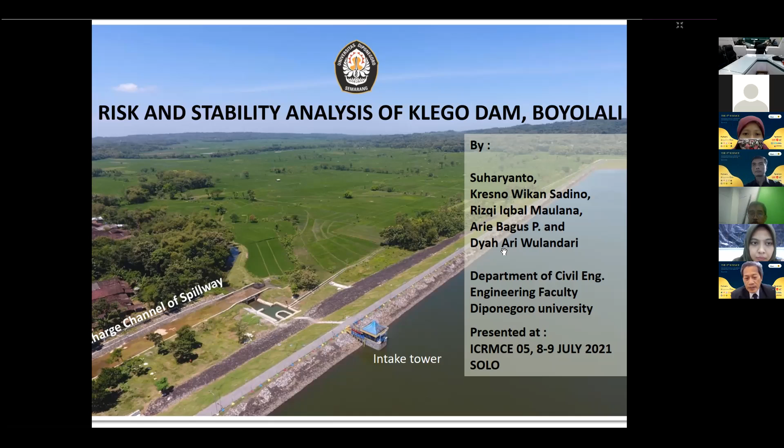The structure of the presentation will be divided into background, condition of Klego Dam, determination of cross-sectional and material properties of the dam, analysis and discussion, and then conclusion and recommendation. Next, please. Now the background.

The Klego Dam actually was built in 1990 and operated since 1993. It is used to supply irrigation water of about 1,353 hectares. The management at that time was by Balai Besar Wilayah Sungai Bengawan Solo, but the allocation of water is managed by Dinas Pekerjaan Umum Boyolali, the Boyolali Regency.

But in 2010, the management of the dam is relinquished to Balai Besar Wilayah Sungai Pemali Juwana, and the water distribution is still under the authorization of Dinas Pekerjaan Umum Boyolali. Why there is a change? Because the location of the dam is at the boundary between the

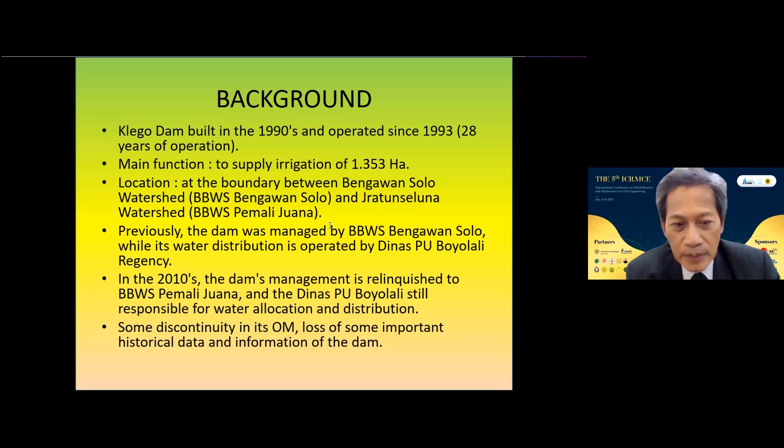Yeah, maybe can we go next? It's only the detailed location of the Klego Dam. And this is the condition for the Klego Dam from the survey we did in 2017. It is actually a small dam. The height is about 10 meters and the inundation area is about 75 hectares, not 1 square kilometer.

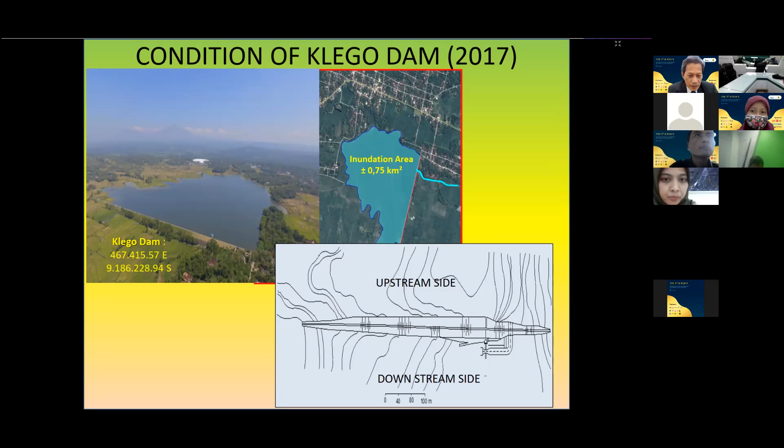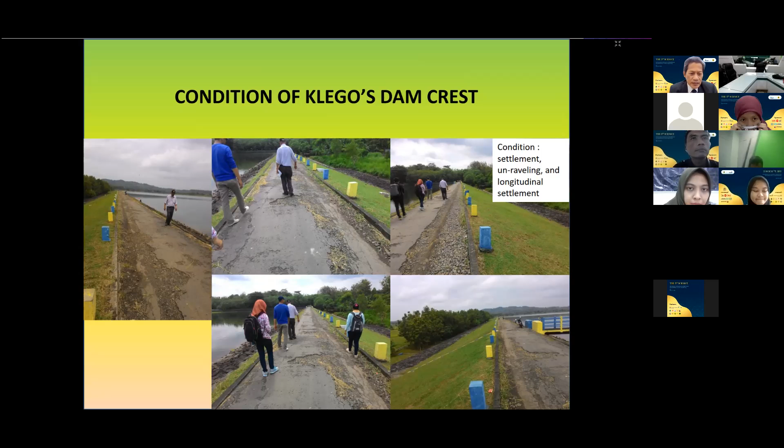Next, please. And this is the dam crest. At the time, people were allowed to pass through the dam crest. I mean, the society uses the dam crest as the access route to the neighboring village. So that's why it has heavy traffic on the dam crest that caused the surface to be rough, and a longitudinal crack and longitudinal settlement are also observed. It is a condition that is not supposed to exist in a dam. Next, please.

And this is showing the condition on the downstream. Also, some rock is misplaced. I mean, maybe some people are moving the rock around. And the condition on the spillway: there is some sedimentation. The function of the spillway is to allow the flood water to escape freely and quickly out of the dam. But if there is some sedimentation, it may hinder it so that the flood cannot discharge freely. So the next.

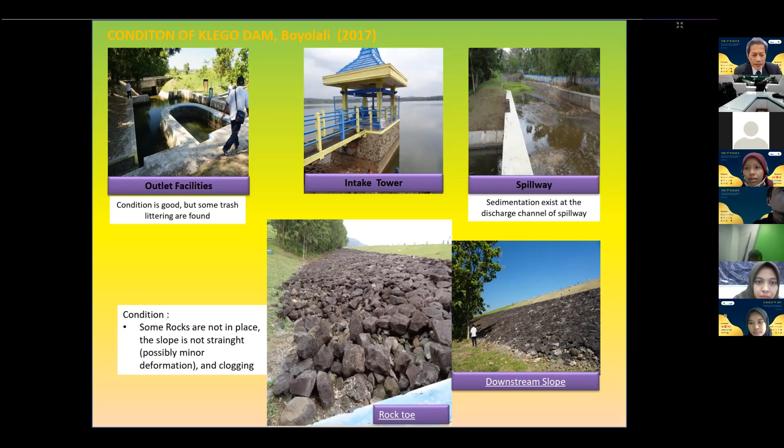Also in the downstream area, there is some fishbone drainage along the downstream slope of the dam clogged with mud, sand, soil, so that when there is rain, the surface runoff, which is supposed to be concentrated in the fishbone drainage to the drainage channel downstream, may flow over the dam body, which may increase the potential for dam body erosion. And also the instrumentation is not functioning quite well. Next.

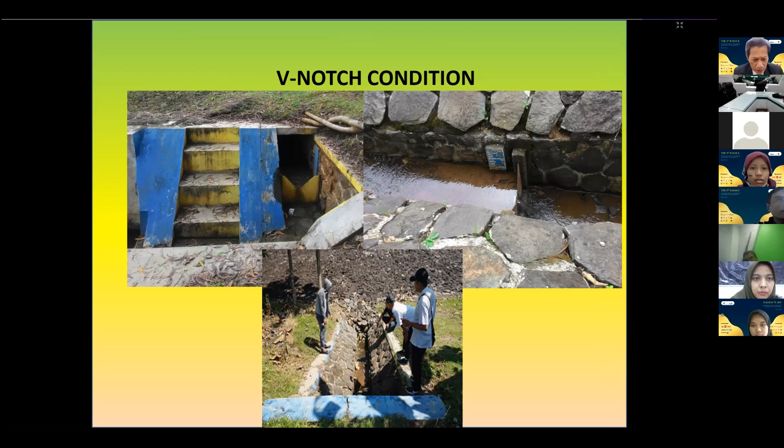The V-notch. The V-notch is the instrument to measure the amount of seepage through the dam. There are two V-notches. One is not functioning, and one is in not good condition. Next. Next.

So the physical investigation shows that the condition is not very good. And also there is a new earthquake map published in 2010 and 2017. So it raised the need to evaluate the safety of the dam. However, we have some difficulties in knowing the properties of the material of the dam.

So we conducted machine boring at 6 locations, boring machine number 1 to number 6. Numbers 1, 3, and 5 are at the downstream side of the dam crest, and numbers 2, 4, and 6 are on the upstream side of the dam crest. The boring is performed to a depth of 10 meters. And every 2 meters, we collect an undisturbed sample, so that we can know the material properties in the dam body. Next.

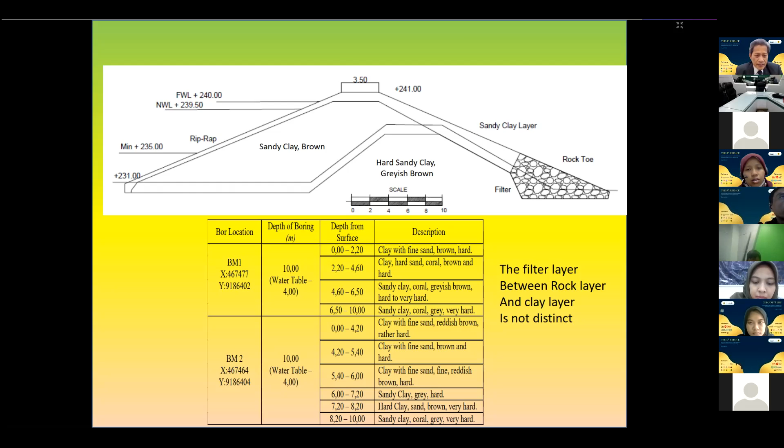So based on this fact, we conclude that the cross-section of the Klego Dam is something like that, with the existing hard clay in the downstream part. Yeah. Next.

And then for the analysis, we first do the risk evaluation, the total risk factor. It's using the capacity risk factor, CRF, and then the dam height factor, height risk factor, HRF, and the evacuation need, evacuation risk factor, ERF, and the downstream damage factor, the DRF.

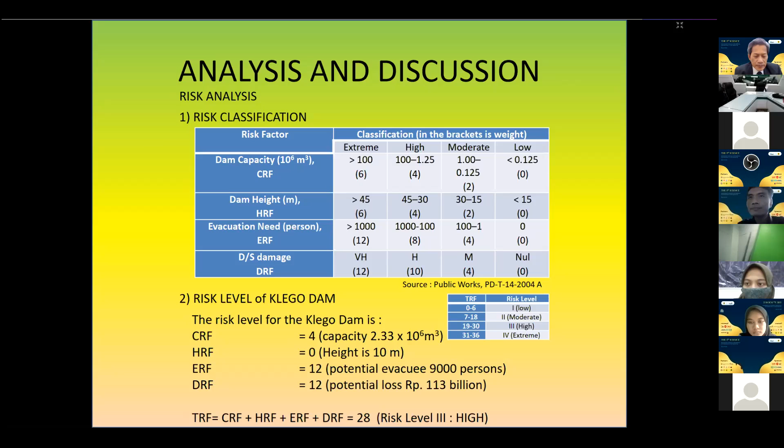So it is very high, 28. The next, please. So based on this high risk, we do the analysis using the OBE and MDE for this return period of the earthquake load. Next, please.

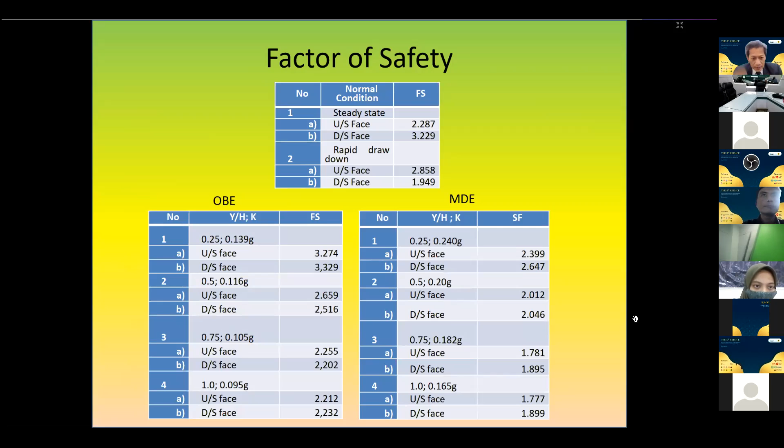Fortunately, during the normal condition it is still over 1.5, and even during the earthquake condition for the OBE load and MDE load, all still over 1.5. So it is safe based on the criteria from the factor of safety. Next, please. It shows the result of the GeoStudio.

The conclusion: it is still safe, even during the OBE and MDE earthquakes. However, the material that we use is based on bore machine data from 6 locations. So more data would give us more understanding of the material of the dam. And from the seepage, it is also safe.

But the recommendation, due to the uncertainty of the dam material, we actually need to do a sensitivity analysis of various variations in the material properties. And the conditions that need to be repaired: the dam crest, the riprap rock layer, the instrumentation, and also the operation and maintenance. We also need to restrict people's access route on the dam crest.

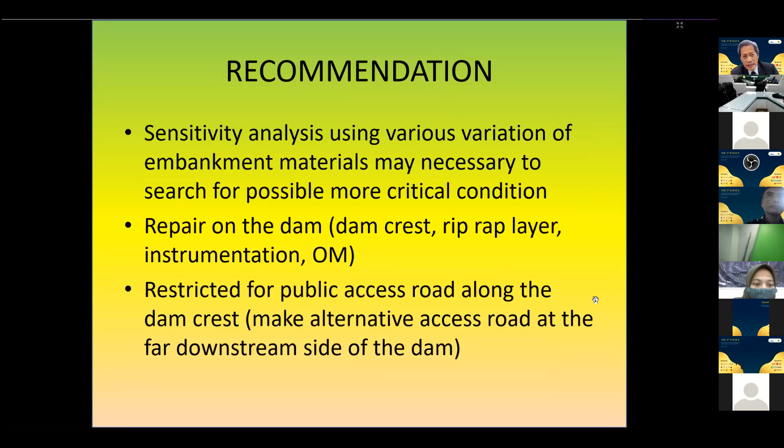Thank you very much, Pak Purwanto. Okay, thank you, Prof. Suharyanto, for your excellent presentation about the condition of Klego Dam. I open discussion for the participants. If you have any question to Prof. Suharyanto, please inform us. You can raise your hand or directly use your microphone to deliver your question.

Maybe if participants want to use Indonesian, it's okay. If you are shy to use English, you can use Bahasa. Probably it is easier. Okay, Mr. Heri. Pak Heri, silakan. Okay, thank you very much for your time.

I have 2 questions for Professor Suharyanto. One question is, from the picture in the presentation, the dam is to recharge the water, right? So my question is, how does the Klego Dam get its water supply? Does it rely on precipitation or rainfall, or another supply?

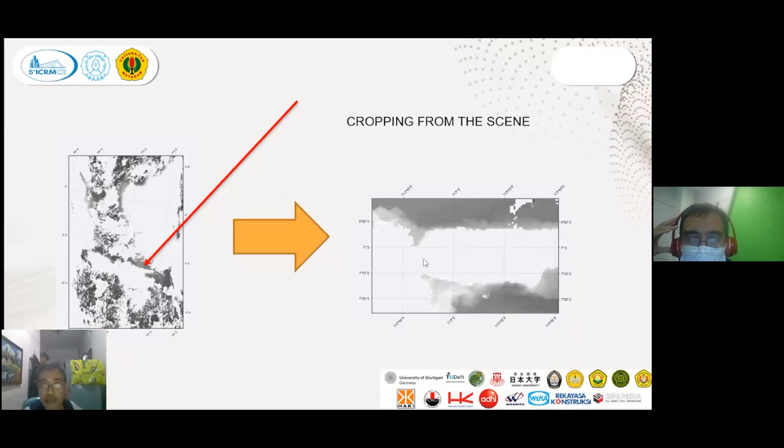And this is the operation on the satellite image scene. This is the whole scene or full scene, and then we did the scene cropping, and the final process is like this. As you can see in this picture, we crop to this location at Bangkalan. And this is the coordinate, longitude, latitude, with the parameter.

This is the summary of the algorithms from the mathematical models: linear, exponent, logarithmic, and power. As you can see, this is the final result of the models, and the best result is the exponent with an R value of 0.779.

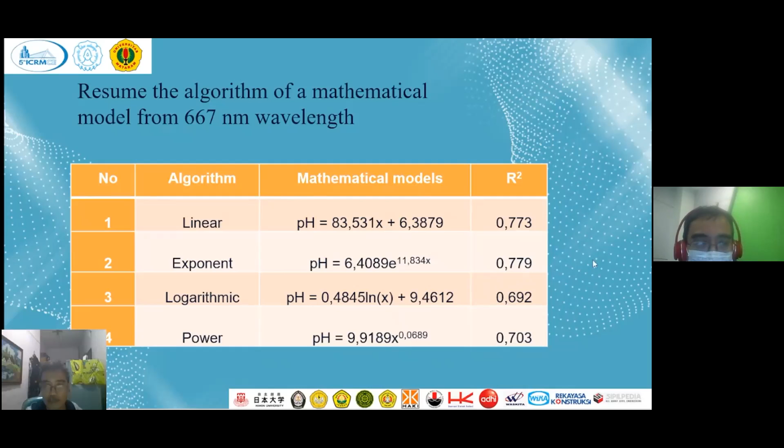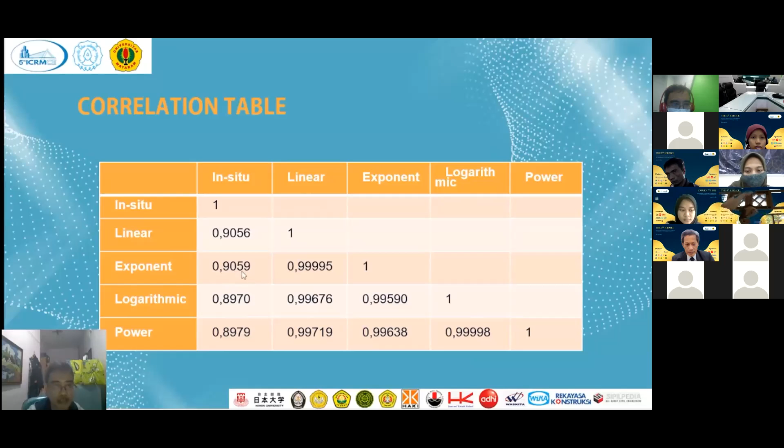And this is the correlation table. As you can see, we compare the in situ with the other models: linear, exponent, logarithmic, and power. And we can see that the in situ has the higher correlation with exponent, 0.9059. So we can choose the exponent algorithm to make a thematic map of acidity value in the area we chose, Bangkalan.

As a conclusion, Aqua MODIS image data can be used as a reference to identify the mathematical model algorithms that are able to calculate any parameter such as the acidity or pH value of the coastal water environment. This study concludes that the distribution of acidity in the Bangkalan coast is still within the safe pH range for aquatic ecosystems on the coast.

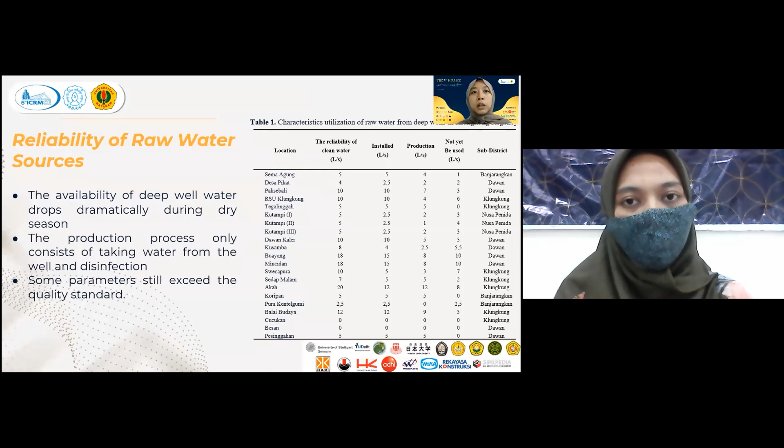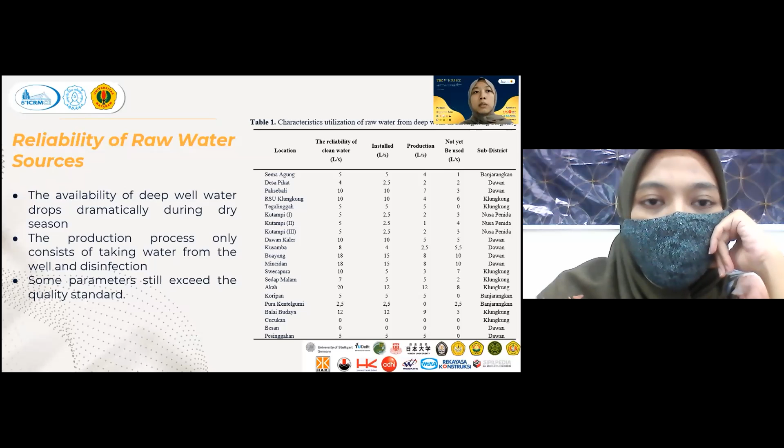The production process only consists of taking water from the well through a submersible pump and disinfection using chlorine gas. Then the water is directly distributed to customers. The disinfection process is carried out by injecting chlorine gas directly into the distribution pipe. However, some deep wells still have some parameters that exceed the quality standard.

Next is water quality. Table 2 showed that the predominant parameter is aluminum, followed by color and TDS. But for this study, no further discussion was carried out for the TDS parameter, since deep wells in the Nusa Penida area, where the excess of TDS occurs, already have a distillation unit to process the excess TDS.

According to Permenkes number 492 of 2010 concerning drinking water quality requirements, aluminum's allowed drinking water content is 0.2 mg per liter, and as shown in table 2, most of the deep wells exceed the quality standard. Excess aluminum content in the body can cause neurological disease, while the presence of color will interfere with water aesthetics and indicate polluted water.

The next one is water treatment decision analysis. Table 3 shows the considerations used in the selection process. The design unit determination is done through a literature study, looking at previous research on aluminum and color removal. The PDAM wants processing that is as simple as possible and does not require high cost. Therefore, several considerations were made to choose a design alternative.

At this stage, the selection unit will be varied in processing methods, materials, or configurations for further evaluation using the MAUT method. The description of alternatives has been discussed previously, proposing 3 alternative processes: adsorption using granular activated carbon adsorbent with a fixed bed adsorption column, adsorption with silica adsorbent with a fixed bed adsorption column, and adsorption with powdered activated carbon.

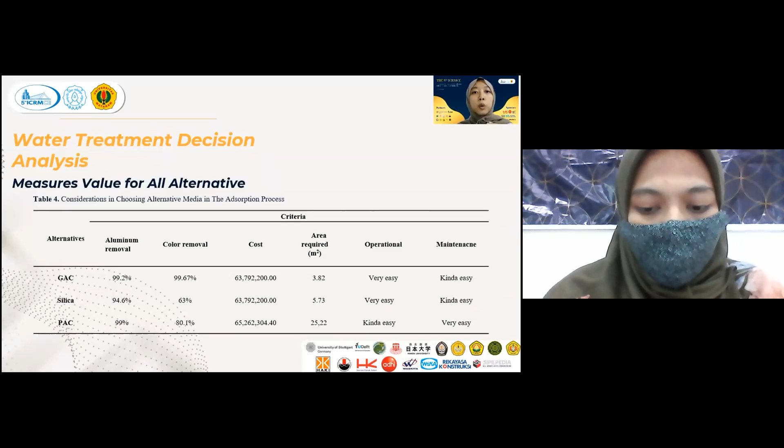After the weight value for the qualitative criteria is determined, a summary is made of all the measure values for each alternative, as shown in table 4. The utility value is calculated on each criterion for each alternative. This utility requires quantified criterion value data. Relative weight calculation is carried out on each measure based on the value of the level of importance. The calculation result can be seen in table 5.

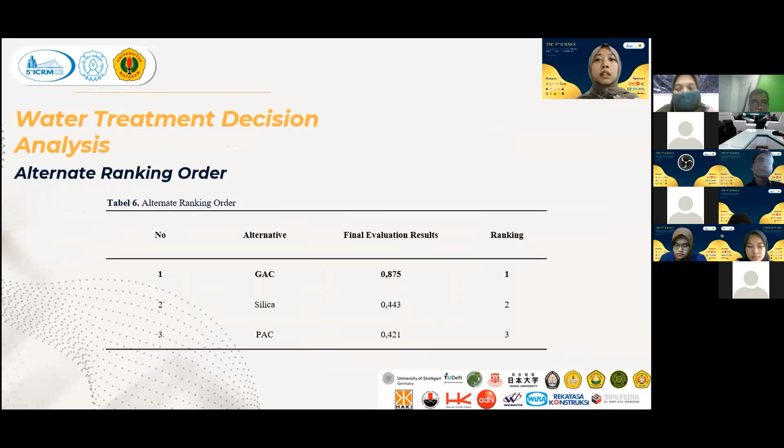In calculating the final evaluation, the utility value data and the weight normalization of each criterion are needed. Based on the analysis using the MAUT method, an alternative ranking was obtained for the deep well, as listed in table 6. Adsorption with granular activated carbon adsorbent was chosen as the best alternative for the well. Figure 1 shows an example of a circuit used, a fixed bed adsorption column in a deep well in Klungkung Regency.

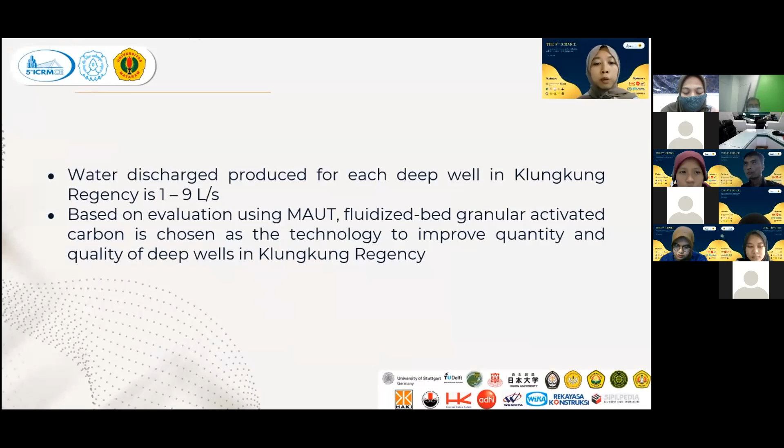After selecting the best alternative, detailed planning should be carried out regarding the granular activated carbon processing implemented in Klungkung Regency. The last one is conclusion. From the study, we can conclude that water discharge produced from each deep well in Klungkung Regency is around 1 to 9 liter per second, and based on evaluation using the MAUT method, fluidized-bed granular activated carbon is chosen as the technology to improve quantity and quality of deep wells in Klungkung Regency.

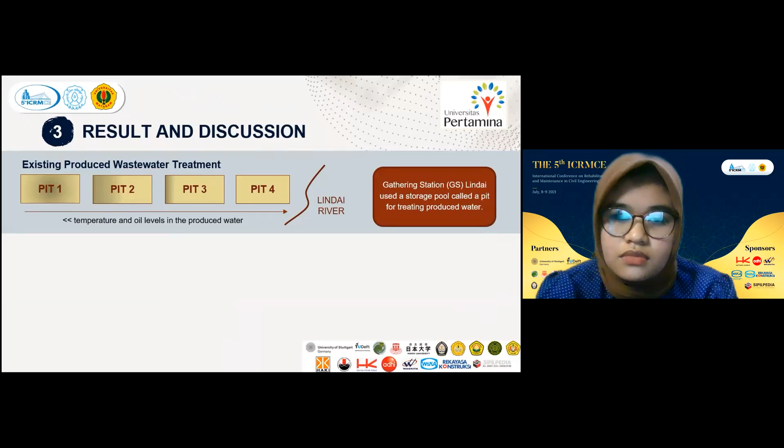And that is why oil and grease removal has the highest score compared to the other criteria. On the other side, the criteria of operation and maintenance is more prioritized than the needs of the efficiency of COD removal, land requirement, and cost. This having a score of 3.

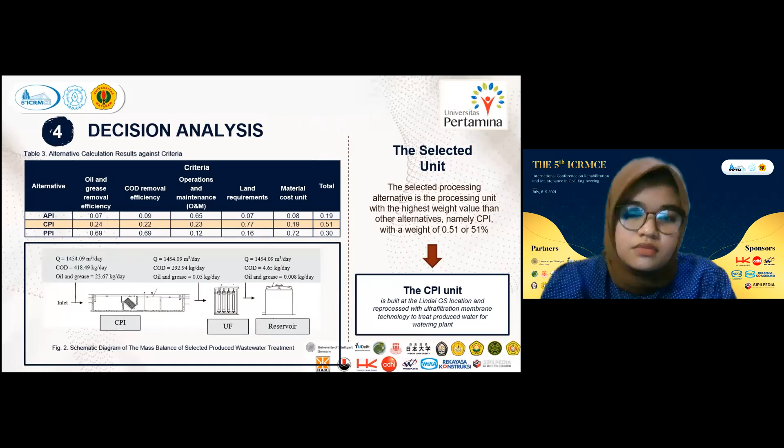Next is the conclusion. The reclamation of produced water from the upstream activities in the oil and gas industry is carried out using a CPI unit and ultrafiltration, selected based on the analytical hierarchical process method, to eliminate high oil and grease and COD content from the water.

This is the reference that we use.

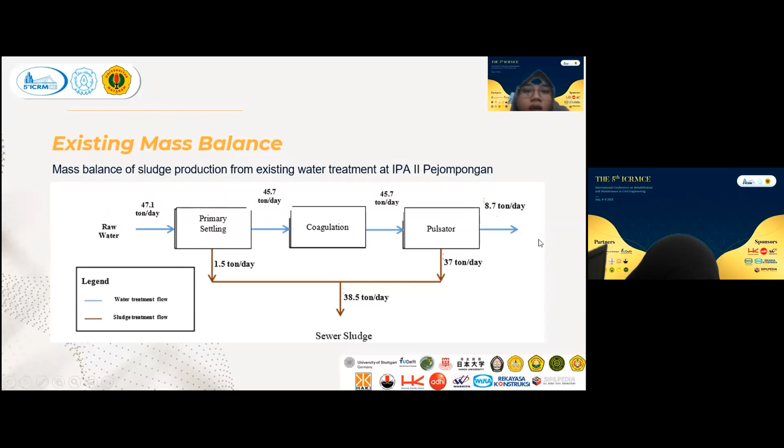Next is data and method. This is the existing mass balance of sludge production from water treatment at IPA 2 Pejompongan. The sludge sampling method is area integrated, combining samples taken from the pre-sedimentation basin, or primary settling, and the pulsator. This is data from IPA 2 Pejompongan from January until December 2019.

Next is sludge quality data. This is a comparison of sludge quality with the standard in Jakarta, and the regulation is the Regulation of the Governor of the Special Capital Region of Jakarta Province Number 69 of 2013.

Next is the method. In this paper, we use 4 alternative mechanical dewatering units, that is belt filter press, centrifuge, screw press, and pressure filter press. In selecting alternative sludge treatment plants, the parameters that must be met are land area and electrical energy requirement. The available land area is 1,300 square meters, and the maximum electrical energy that can be used for a sludge treatment plant is 100 kilowatts.

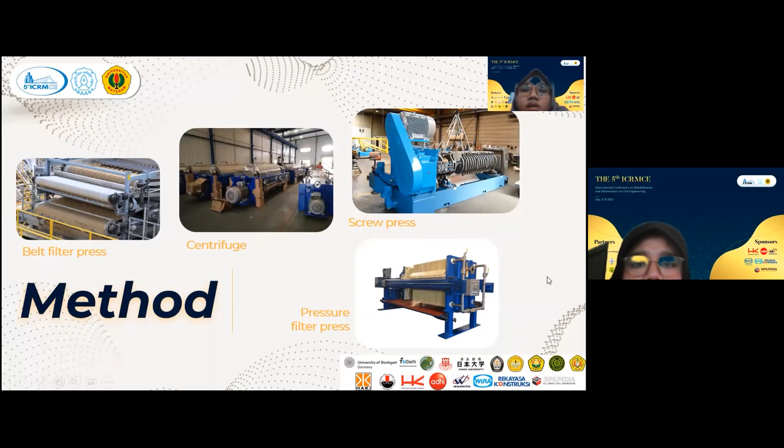TOPSIS is a method that can determine the best alternative from several alternative solutions with various criteria. This is the equation. There are the positive ideal solution, negative ideal solution, and the preference value. The key point of this method is the greater the preference value, the smaller the distance to the positive ideal solution, and the further away the distance to the negative ideal solution. The alternative with the greatest preference value will be chosen.

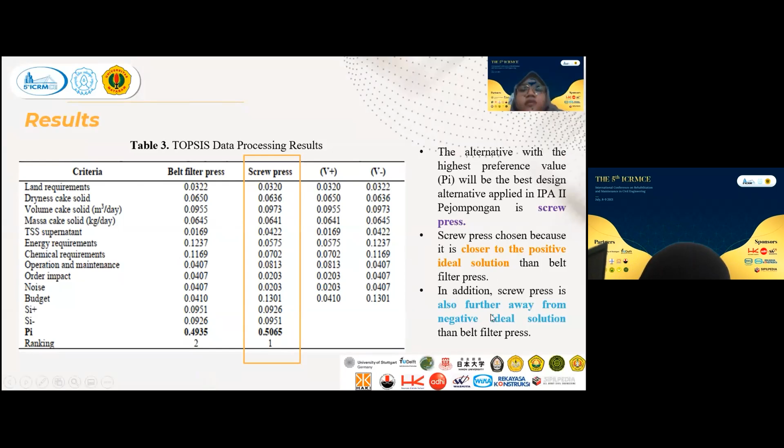And these are the TOPSIS data processing results between the belt filter press and screw press. The result is that the screw press is the alternative with the highest preference and will be the best design alternative applied in IPA 2 Pejompongan. Why screw press? Because the screw press is closer to the positive ideal solution and also further away from the negative ideal solution than the belt filter press.

And so the conclusion is that the results of the best alternative selection analysis show that the screw press can be used as sludge treatment at IPA 2 Pejompongan. And before using the screw press, pre-treatment in the form of gravity thickening and sludge conditioning is required. And these are the references we use in this paper.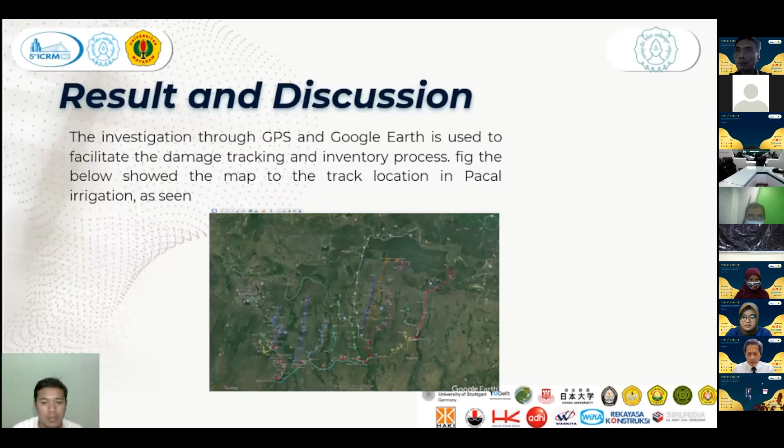Next, the investigation through GPS and Google Earth is used to facilitate the damage tracking and inventory process. The picture below shows the map to track location in Pacal irrigation. After the investigation, the results show the damage to Pacal irrigation infrastructure. The evaluation is based on Minister of Public Works and Public Housing Regulation number 12 of 2015, where the physical condition index is presented in the table below.

Based on the result above, Pacal irrigation infrastructure condition can be determined. According to the table above, the damage of Pacal irrigation main infrastructure is 4.40%. It came from a lot of components such as reservoir, sluice, sand trap, and wastegate. On the other hand, the damage of 7.40% happened in canals and 0.75% in canal structures. The total damage in Pacal irrigation infrastructure is 12.55%, showing a minor level of damage.

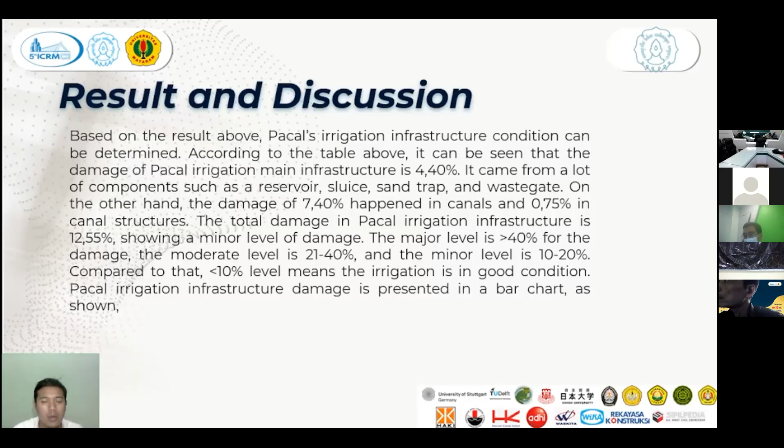The major level is more than 40% damage. The moderate level is 21 up to 40%, and the minor level is 10 up to 20%. Compared to that, less than 10% means the irrigation is in good condition. Pacal irrigation infrastructure damage is presented in a bar chart as shown. Requirements for the maintenance of the irrigation scheme of each irrigation area must consider the performance of the irrigation area in the aspects of the physical infrastructure condition of the network and other supporting aspects.

In conclusion, from the analysis above, the physical damage of Pacal's primary canal is 12.55%, indicating a minor level of damage. Meanwhile, for the area's network and infrastructure, regular maintenance was needed to ensure the irrigation performance ran efficiently for watering the agricultural field. That maintenance could be cleaning the weed that grew uncontrollably around the canals, plastering the cracks of the broken canal walls, lubricating the hinges of sluice, coating the sluice gate with anti-corrosion paint, and changing the broken wood.

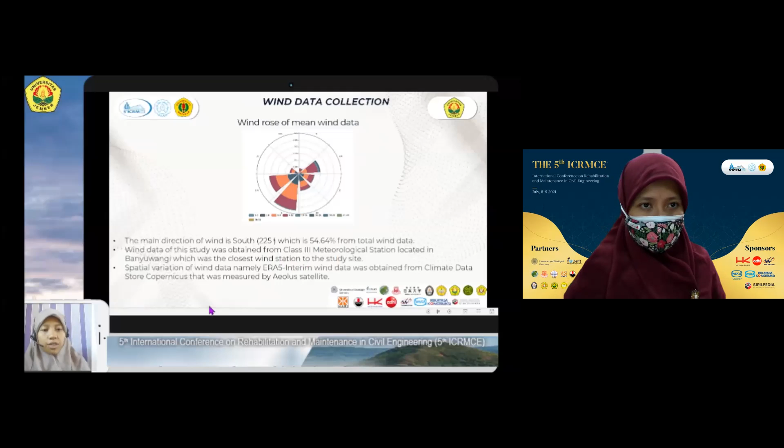Wind data of this study was obtained from Class 3 Meteorological Station in Banyuwangi, which is the closest station to the study site. And also we use the spatial variation of wind data from Climate Data Store Copernicus. For the bathymetry data, we use the bathymetric data from Indonesian Geospatial Information Agency.

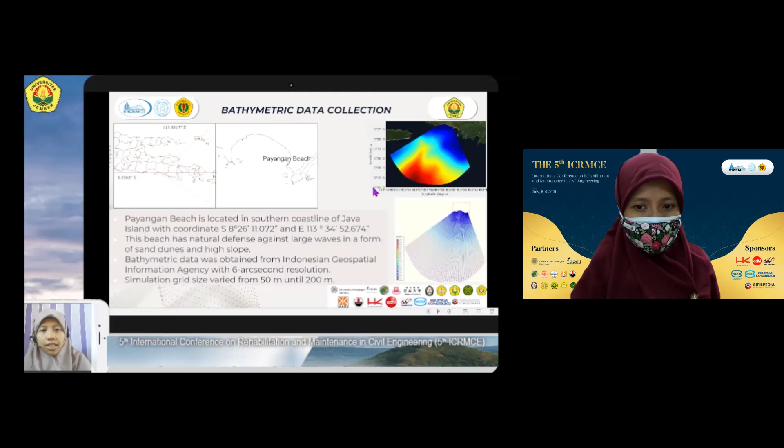And this is the bathymetric data, and the simulation grid size shown here with the size variation from 50 meter until 200 meter. Payangan Beach is located here. It is at the southern coastline of Java Island. This is the simulation results that we obtained in 2017.

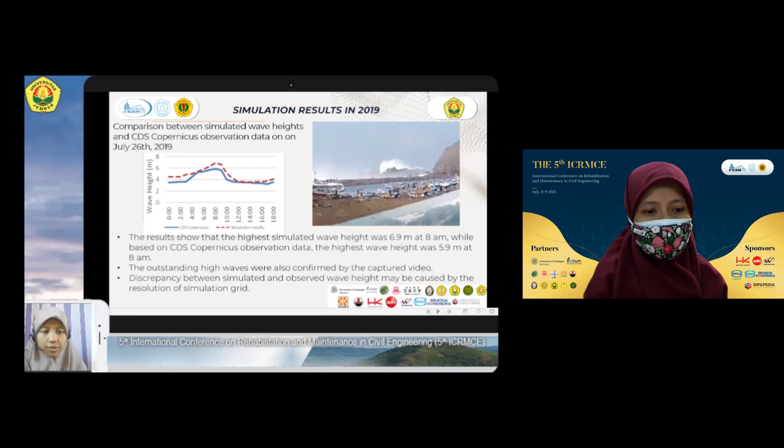Although there is still discrepancy between simulation and observational wave height, that may be caused by the quite small resolution of simulation grid. In 2020, the simulated wave height and the observation data reach almost similar results. And different from the simulated wave in 2017 and 2019, in 2020, the high wave occurred not in July, but 2 months earlier, which is in May.

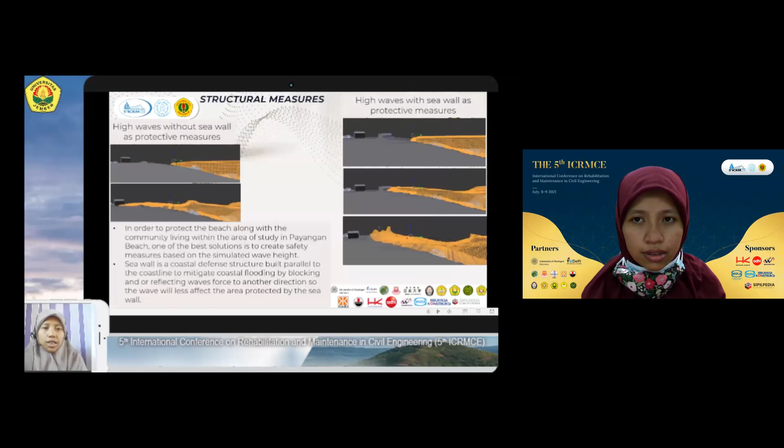In this slide, we try to make an illustration of the differences between the condition of houses with and without seawall. If there's no seawall, then the high waves that propagate from the ocean to the beach will inundate the houses. But when the seawall is developed here, the wave will be stopped by the seawall and it will not inundate the houses. So it is necessary to build the seawall as safety measures based on the simulated wave height.

As the conclusion of this study, high waves occurring at Payangan Beach are significantly high because of direct exposure to wind and wave from the open ocean. The simulated result in 2017 shows significant wave height of 2.5 meter to 4.5 meter near shore and around 5 meter offshore. However, in 2019, wave height reached 6 meter to 7 meter near shore of Payangan Beach.

And also in 2020, high wave occurred 2 months prior to other years, when it always occurred in late July, and that may happen because of climate change, and preventive measures must be taken into consideration to protect the coastal area and residential area located in Payangan Beach.

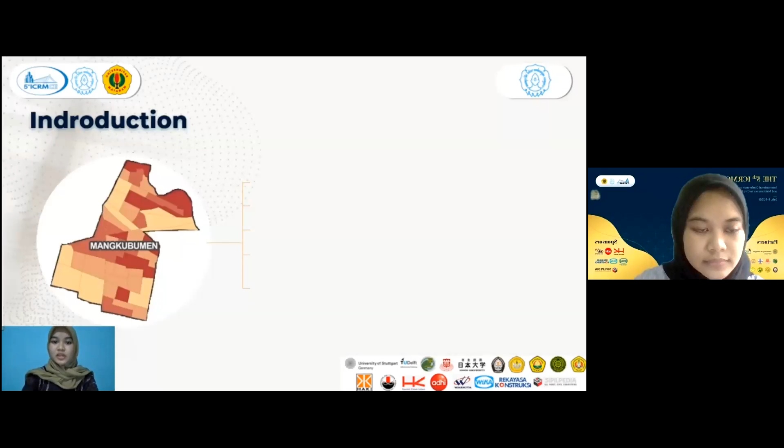This research started from public complaints about the frequent occurrence of inundation during the rainy season in Mangkubumen. Mangkubumen is one of the villages located in the center of the city of Surakarta. The population that continues to increase and the development of the trade and services sector makes land that was originally open to be built up. This, of course, will have an impact when the rainy season arrives. In addition, the drainage system in Mangkubumen village still uses a conventional drainage system in which all runoff will be transferred into the channel. Of course, from year to year, the channel will end its service life so that it is no longer able to accommodate the runoff.

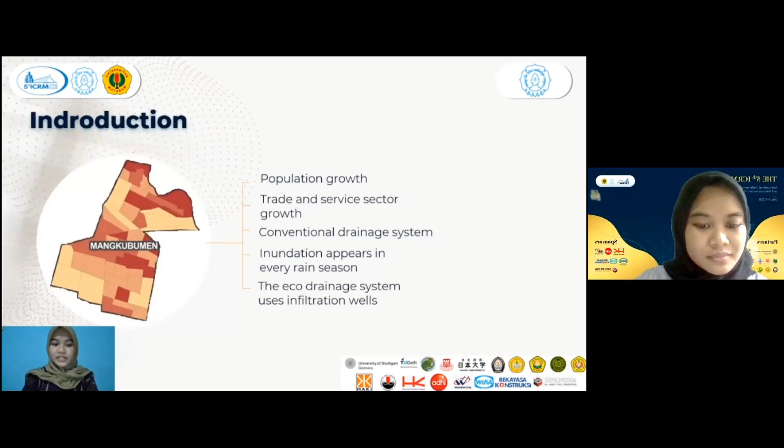The solution to this problem is to absorb water back into the ground by using infiltration wells as an alternative to an eco-drainage system. The concept of eco-drainage system is to maintain the existing channel so that the infiltration well will be placed at the bottom of the channel, with the assumption of the research being that the drainage channel is rainwater drainage. The main objective of this research is to determine the reduction of runoff by implementing infiltration wells in Mangkubumen village.

In this study, I conducted a survey of drainage canal tracing to obtain the existing condition and capacity of the channel. Next, I used the rational method to calculate the return period of peak discharge. The return periods of peak discharge that I use are 2 years and 5 years for residential area and urban area. Furthermore, to find out the inundation area resulting from the peak discharge, I used software named HEC-RAS. And lastly, I used the Sunjoto method to calculate the dimension and the absorption discharge that occur.

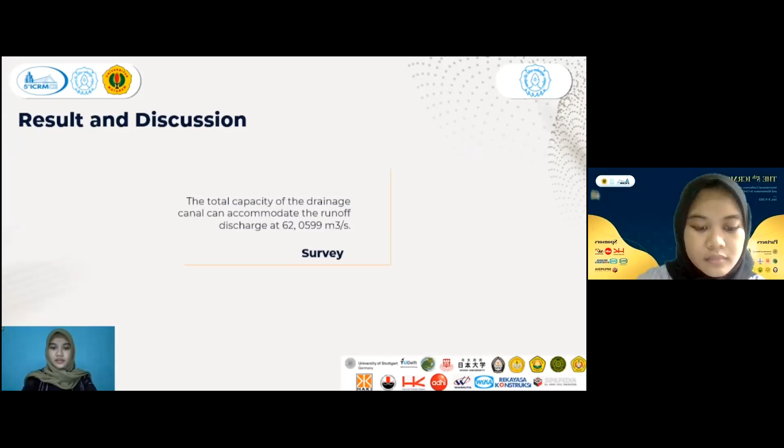The first result is the total capacity of the drainage canal, which can accommodate the runoff discharge at 62.0599 cubic meters per second. The next is peak discharge. The peak discharge in return period is calculated by using the rational formula. The peak discharge in return period 2 years is 18.2089 and for 5 years is 22.9937 cubic meters per second. And here is the graph of peak discharge using the rational method.

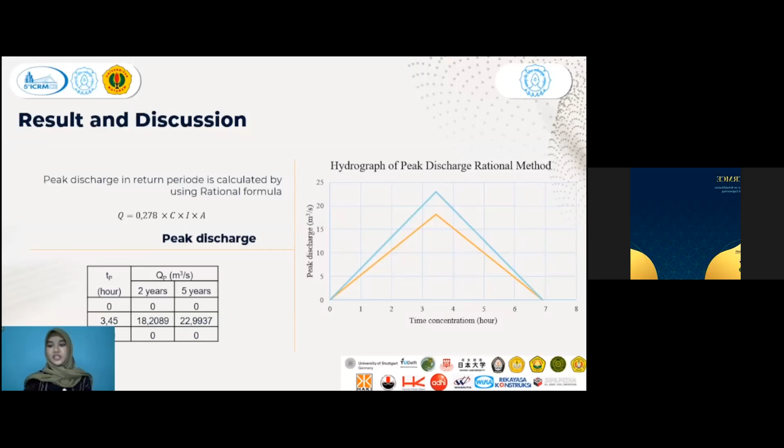And next is about running HEC-RAS. The peak discharge for the return period of 2 years and 5 years is inputted into HEC-RAS, and the output is the map of inundation. The area of inundation because of the 2-year peak discharge is 25 hectares, and because of the 5-year peak discharge, the area is 28 hectares.

And about the channel capacity: for the peak discharge of return period 2 years, the channel capacity can accommodate the runoff, but for the peak discharge of 5 years return period, the channel capacity cannot accommodate the runoff, and there is an inundation. And here we go to infiltration wells. The depth and absorption discharge of the infiltration wells are calculated by using Sunjoto's formula.

And here I have two alternative infiltration wells. The difference is the diameter and construction. The first alternative I use is PVC pipe construction with a diameter of 16 inches. The second alternative I use concrete construction with an inner diameter of 30 centimeters.

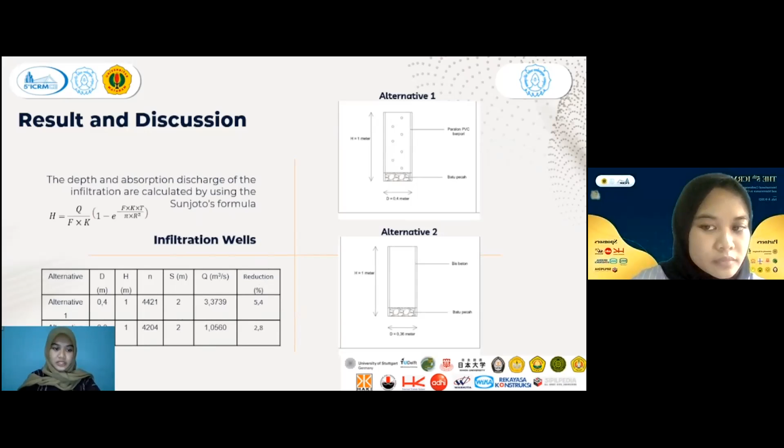And the reduction of alternative 1 is 5.4%, and the reduction of alternative 2 is 2.8%. And here is the cost per well: alternative 1 is PVC construction, cost 800,000 rupiah, and alternative 2 using concrete wells, the cost is 89,000 rupiah.

And the last is about the conclusion. First, the existing channel's capacity is able to accommodate runoff due to return period discharge 2 years, but it cannot accommodate the runoff due to period discharge 5 years at 906.42 cubic meters. The second, there are two alternatives of infiltration wells.

Alternative 1 can reduce the drainage load by 5.4%, but costs 800,000 rupiah per well. And the second alternative can reduce the drainage load by 2.8%, costs 89,000 rupiah. And the last, the dimensions of alternative 1 are diameter 40 centimeters and height 1 meter,

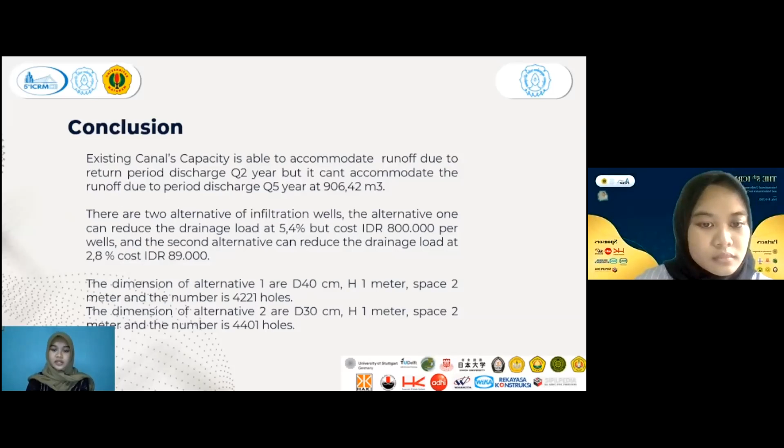and space between wells 2 meters, and the number is 4,221 holes. The dimensions of alternative 2 are diameter 30 centimeters and height 1 meter, and space between wells 2 meters.

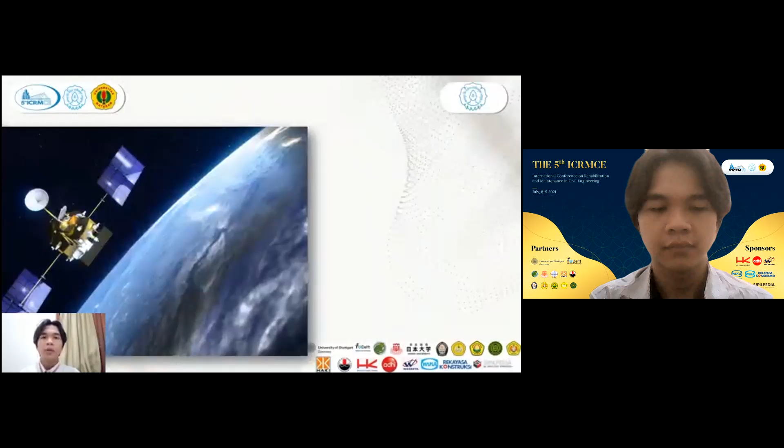The National Disaster Management Agency, BNPB of the Republic of Indonesia, noted that in 2018, 151 landslides occurred in Central Java Province. Landslides can be caused by rainfall; water falling down a slope will become a burden to the soil, affecting its stability. The need for rainfall data is essential in this case. The limited availability of rainfall gauges is a significant problem in Indonesia. Therefore, other data sources are needed to be processed in a particular case study, and one of the data sources is the Tropical Rainfall Measuring Mission, or TRMM data.

TRMM is a joint project between NASA, America, and the Japan Aerospace Exploration Agency. However, satellite data is considered less representative of the actual condition in the field. Therefore, validation of rain data needs to be done. The point of view carried out in this study is to validate the TRMM data to be used for safety factor analysis.

So this is the study of literature. Research conducted by Syaifullah in 2014 shows that GSMaP_NRT has a better correlation value to data on rainfall at the rain gauge station compared to data from 3B42RT.

A data homogeneity test was carried out to ensure that the data used were classified as homogeneous. And from there, the variation of rainfall between stations is linear, and any post is considered to represent the nearest area. The SCS-CN method is considered possible to analyze the infiltration, because this method also considers soil condition in determining the curve number.

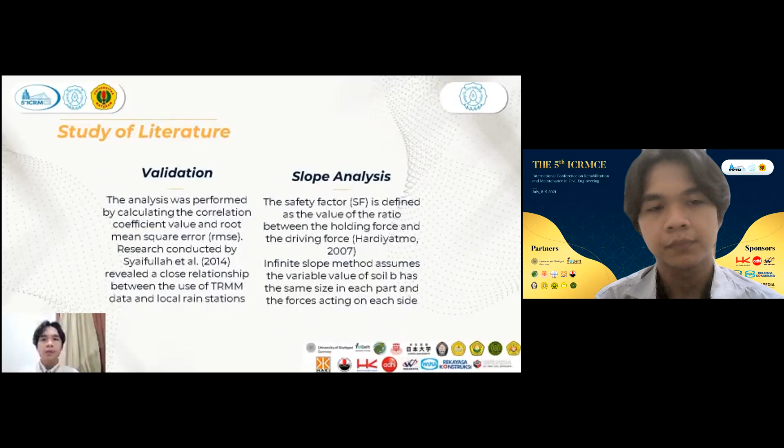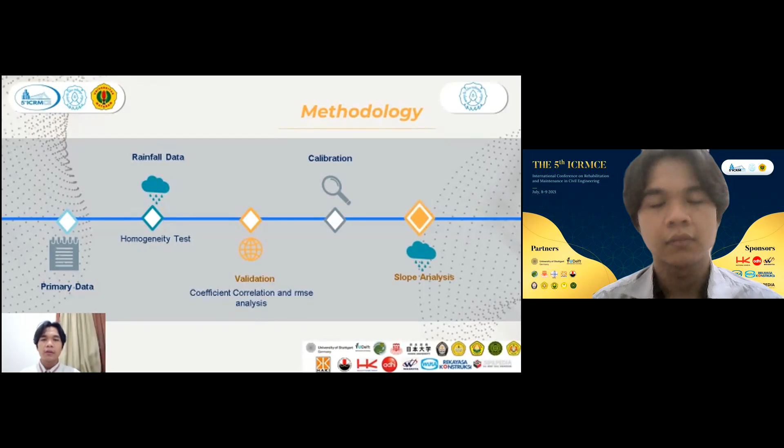Validation analysis uses maximum monthly data from 2014 until 2020. The daily rainfall data had values that tend to vary between satellite and actual data. Analysis of 2 days rainfall data shows that the correlation coefficient is 0.22 and error value is 46.47 mm per day. The analysis of total monthly rainfall data shows better values than the 2 days rainfall data.

The correlation coefficient and error values are 0.76 and 251.63 mm per month, or equal to 20.97 mm per day. By eliminating data that is far apart from other data, we obtain data with a tendency to approach the linear line formed.

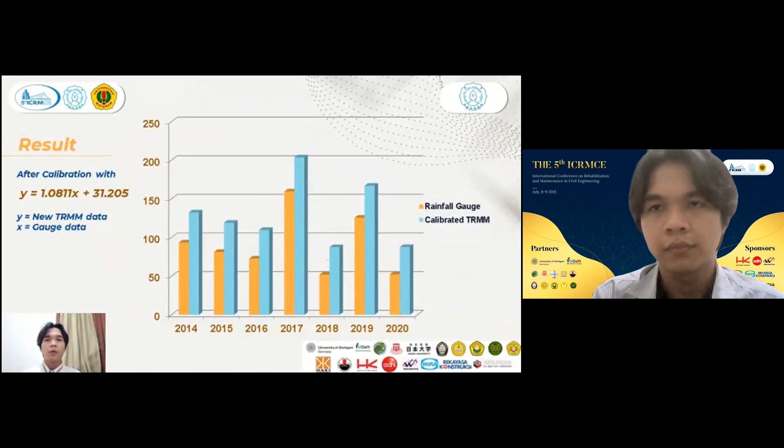TRMM data can be used to overcome the problem of limited sources of rain data. If the study area does not have much reliable rain data, TRMM data can be used. Validation based on total monthly rainfall data has a high enough correlation coefficient and minimal error compared to validation based on 2 days rainfall data.

We suggest validating with more comprehensive rainfall data and various methods for its utilization. It is expected that more comprehensive rainfall data will provide more reliable accuracy and validation. The use of various methods to validate the TRMM rain data is expected to provide a new approach leading to the most reliable results in the future. And that's all for the presentation. Thanks.

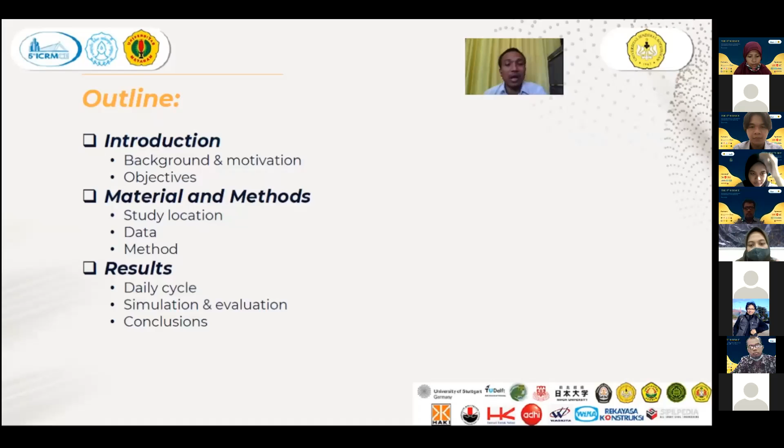This is the overview of what I'm going to present. First, I will give you some background and motivation on why this topic is interesting and why I chose to do this study. Then I will talk about the purpose of this study. After that, the material and method of this research will be presented, including study location, data, its type, spatial and temporal coverage, and its quality, as well as the method. Afterwards, I will go over some empirical investigation research. At the end of my talk, I will conclude the findings of this research.

Precipitation is one of the main and important inputs of hydrological system analysis, which is implemented in many areas of water resource projects, including flood mitigation strategies. Unfortunately, precipitation data are frequently inadequate in observation datasets in terms of length of data, spatial coverage, and completeness. This is because of the small number of spatial observations and the error of instruments. Insufficient precipitation data regarding time series length and spatial coverage can lead to serious problems in hydrological analysis, resulting in either underestimation or overestimation of hydrological values.

To overcome the lack of high quality precipitation observation data, rainfall models are required to fill in missing values as well as to extend the length of data at an observed location. The goal of the current research is to derive hourly rainfall data based on daily data, since daily rainfall data have better quantity and quality rather than hourly data.

Let's move to the data and study location. The data in the study were obtained from the Meteorology, Climatology and Geophysical Agency, or BMKG. Rainfall data used here is on hourly and daily scales. The study location was taken from the rain gauge stations having relatively complete data from all stations in Java Island.

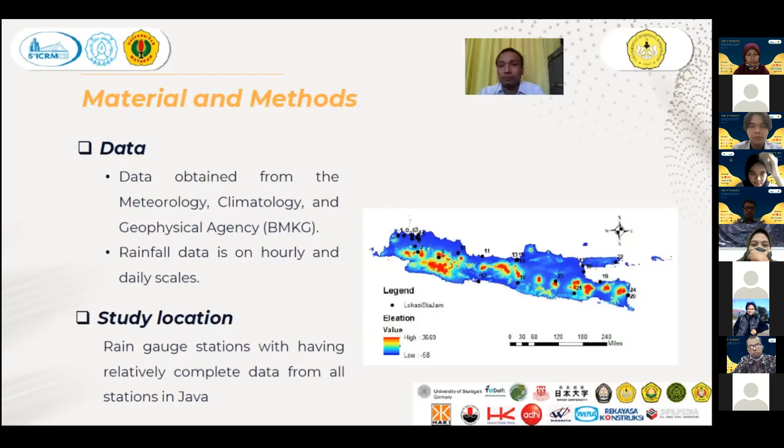Now we are going to talk about the method of research. In preparing the data, all rainfall stations that have a relatively long, complete and continuous measurement period are identified and selected for further analysis. Then, for each hourly rainfall station that has been selected, the cumulative rainfall amount on a daily scale is carried out. Two data sets of rainfall are collected at the same time.

There are two types of modeling approach taken here, namely the approach where the rainfall data series for both zero and non-zero rainfall was calculated, and another approach where only non-zero rainfall data series were carried out in the modeling stage. After obtaining the hourly rainfall simulation modeling using daily rainfall data, it is necessary to evaluate the performance of the model.

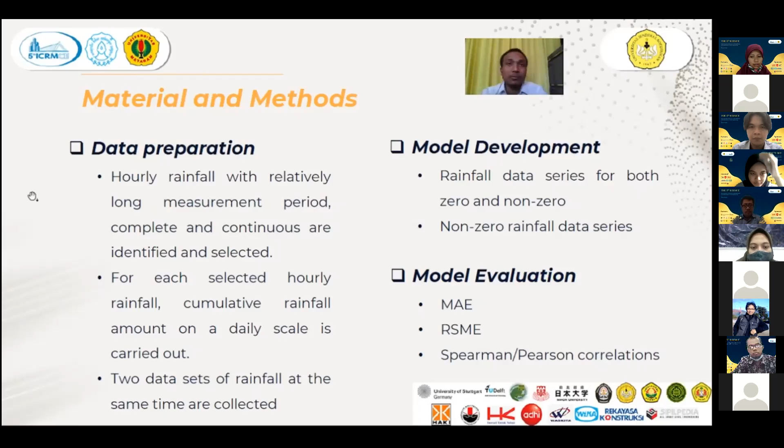There are several measuring tools to find out how well the modeling developed, consisting of mean absolute error, root mean square error, Spearman, or Pearson correlation. Okay,

From the 25 stations, those with a percentage of missing values less than 31% of total data are Stasiun Citeko and Stasiun Dermaga. Citeko has around 24% of data missing, and Dermaga has around 30% of data missing.

Based on the investigation from the rain gauge stations that have relatively good quality hourly rainfall data, namely Station Citeko and Dermaga, and using two different seasons, the wet and dry season, we have found the most interesting finding, that is a daily cycle. What does daily cycle mean? There is a general diurnal pattern that rainfall events mainly occur at a specific time for the majority of wet days. Many rainfall events are concentrated in the afternoon or at night.

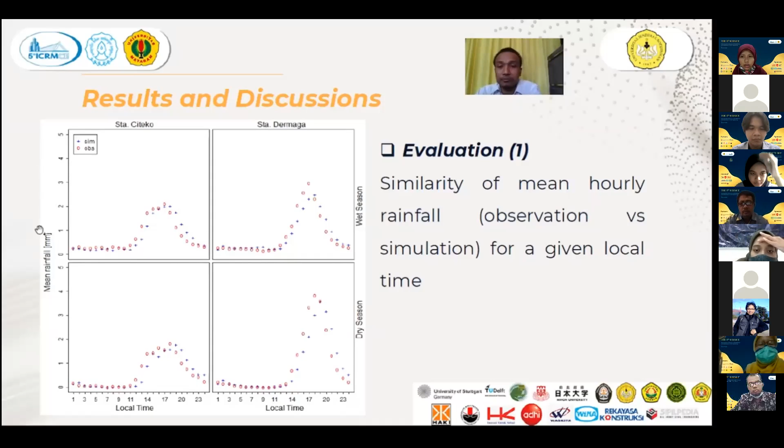The next evaluation of the model is how small the error or bias of the simulated rainfall values compared to the observed rainfall can be obtained. Here we use mean absolute error and root mean square error for the second evaluation of the model. The prediction models are said to be best if the values are close to zero.

However, the correlation coefficient for both of them is quite small because it cannot preserve temporal series dependencies properly, as normally used for forecasting purposes. Nevertheless, for design purposes, the model can be used because it can maintain the characteristics of data sets, such as mean values.

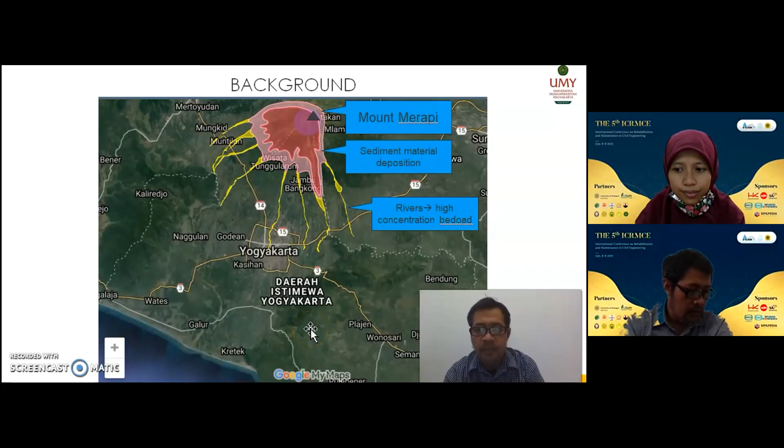So some of the rivers which originate at Mount Merapi have a potential hazard, namely floods with high sediment concentration. In Bahasa we call it banjir lahar dingin. The flow with high sediment concentration gives a significant impact on the river morphology process and of course impacts the riverbank protection. Because the river flows through the city and has many bank protections, river morphology should be paid more attention in Yogyakarta.

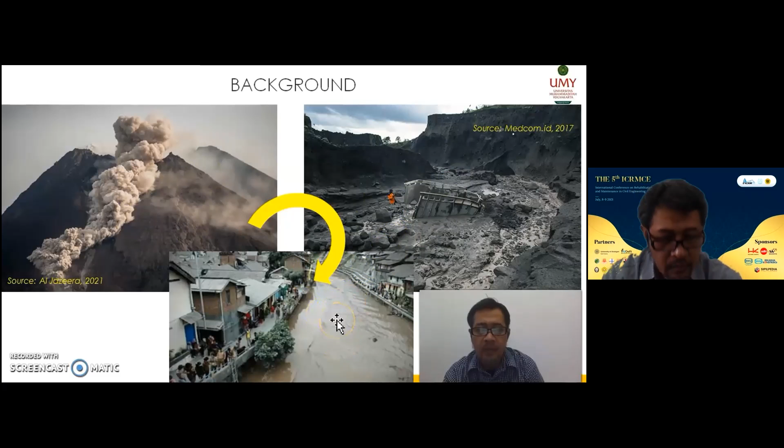This is the illustration of the Mount Merapi eruption. The sediment material deposits at the upstream area and will flow down, and the river has a flow with high concentration. So the problem is about sediment transport, erosion depth, and riverbank protection. The purpose of this study is to analyze riverbed erosion due to the concentration of bedload transport, and the benefit of the simulation is related to the morphology process and the evaluation of the river construction.

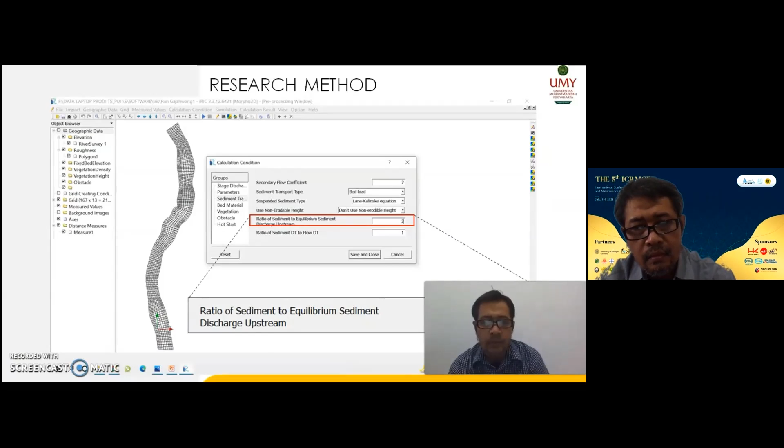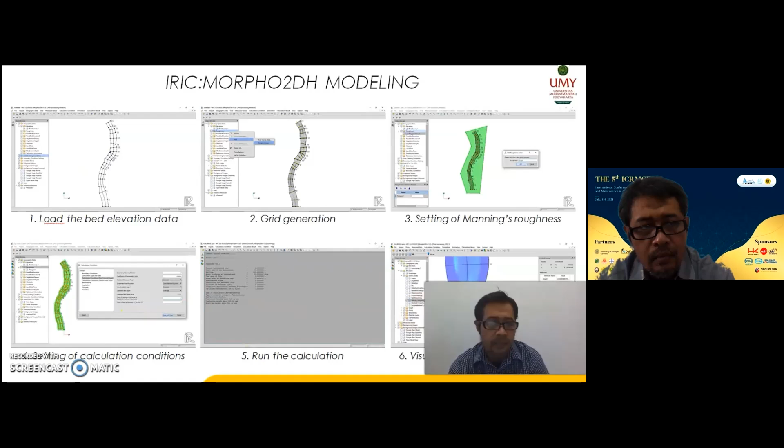The steps for the modeling are: load the bed elevation and generate the grid, set the calculation parameters and the calculation condition. We set the sediment concentration ratio in this step and run, then we get the result. So in some areas of the river, more bed erosion occurs when running with the small debris flow condition.

This condition can be explained as follows. When bed load transport occurs, some areas will have deposition in a large volume. Because of the deposition, the capacity of the cross-section will decrease. This condition will force an increase of flow velocity on the other side, around the deposition, or on the opposite side of the deposition. The increase of flow velocity will produce an increase of bed shear stress, which will produce more erosion and more degradation.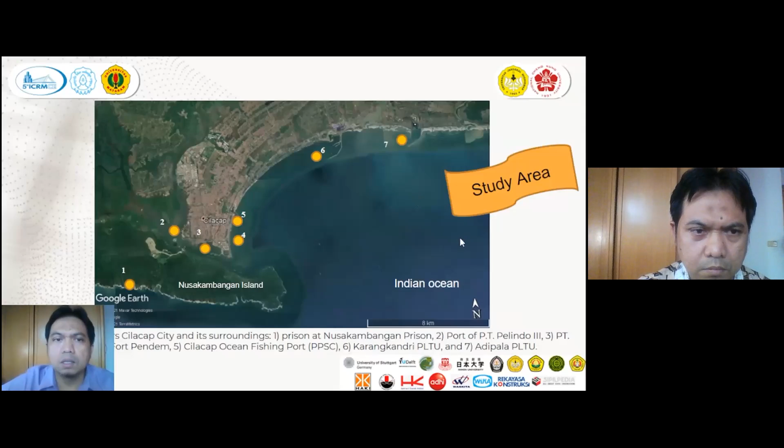The method we use is numerical simulation. Tsunami wave generation is based on Okada's theory, which requires input: epicenter, focal depth, fault length, width, strike angle, dip angle, slip angle, rake angle, and slip.

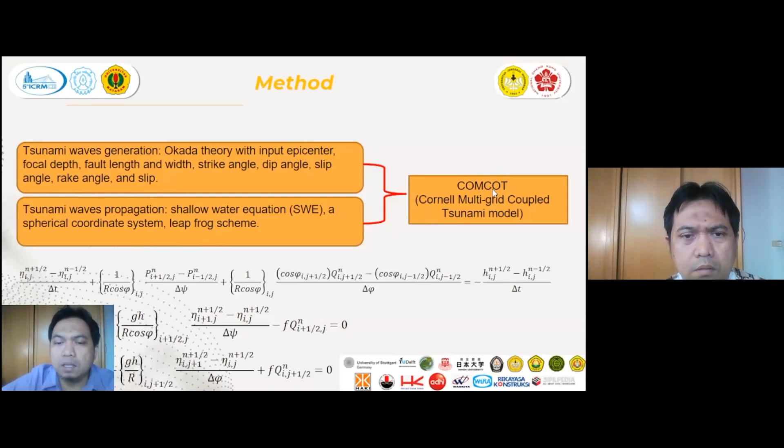And as for tsunami wave propagation, the shallow water equation uses a spherical coordinate system and leapfrog numerical scheme. Both processes are carried out using the COMCOT model. This is an open source software. The result of numerical simulation can be presented in a horizontal 2D view like this.

If the snapshot is taken at a longer running time, in this case we take 2200 seconds or 36 minutes, we will find that the tsunami waves have arrived in the study area. Figure 6, reached the city of Cilacap. The tsunami reached the city of Cilacap after traveling from the source of the earthquake in the Indian Ocean.

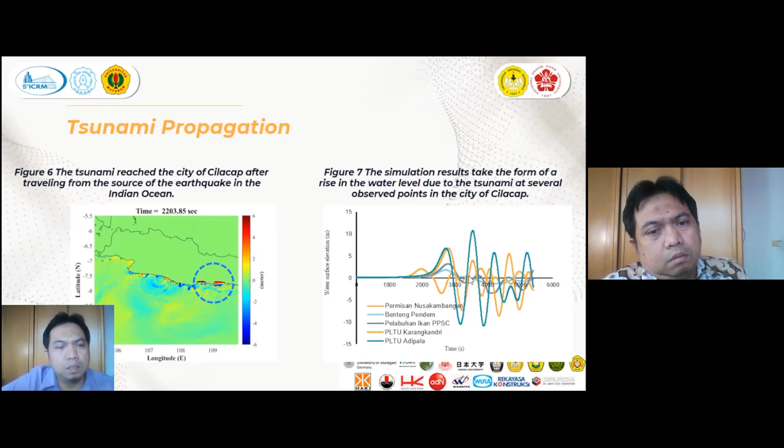Several conclusions can be drawn. Cilacap coast has significant potential for a tsunami. High tsunami can occur at the PLTU Karangkandri and the PLTU Adipala with 6.7 and 10.7 meters high, respectively.

In addition, we also recommend several future works, including it is necessary to consider the source of earthquake and tsunami for other nearby megathrust segments, such as Enggano segment in the western part and East Java segment in the eastern part, and also considering probabilistic tsunami hazard assessment.

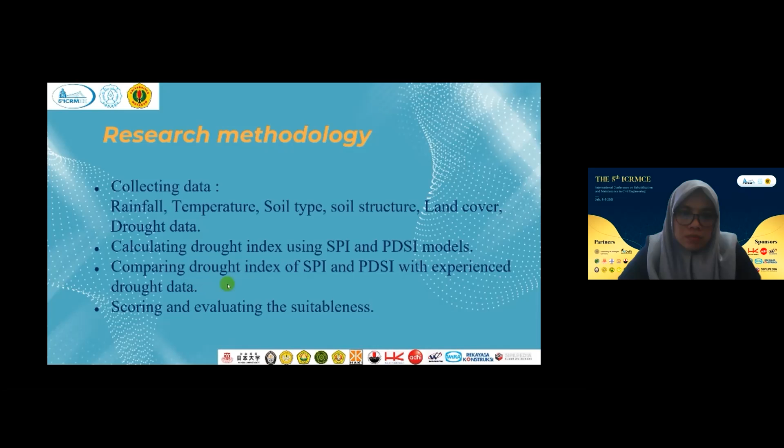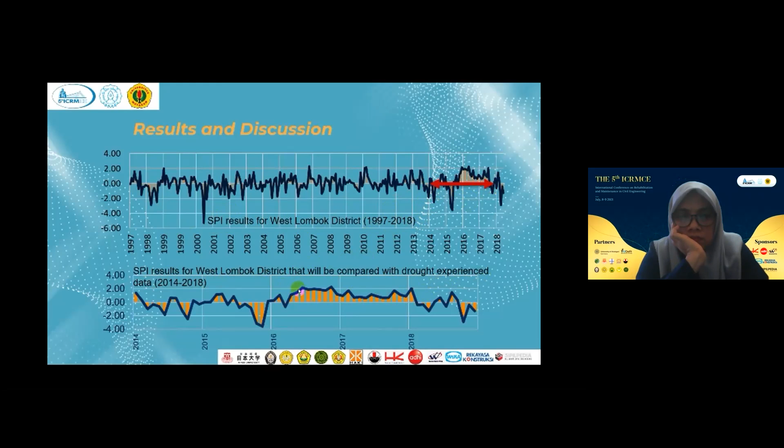After we collected the data and presented it in a numerical table, we continued by calculating the SPI drought index, and this is the result of calculating the SPI index for West Lombok from 1997 to 2018. Although we calculated SPI from 1997 to 2018, we only used the latest four years to compare with experienced drought data, since the drought experience data was only recorded from 2014 for West Lombok District.

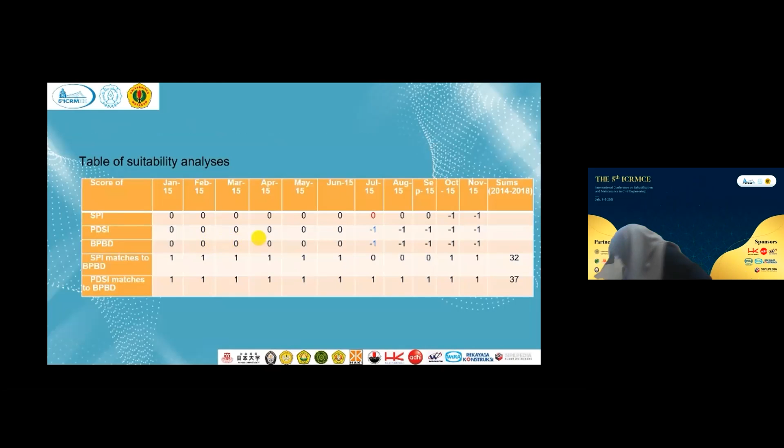The next analysis is the suitability analysis. The suitability of the model was measured by the number of matching scores between SPI and PDSI scores against the BPBD drought data score. For example, in July 2015, SPI resulted in no drought condition, but PDSI resulted in a drought condition, and BPBD recorded drought at that time. So SPI did not match with BPBD, so we give 0, and because PDSI and BPBD matched, we give 1.

The next step is to sum up the total matching score. We summed up the total matches value from SPI to BPBD and PDSI to BPBD, and we got 32 matches for SPI and 37 matches for PDSI to BPBD for West Lombok District.